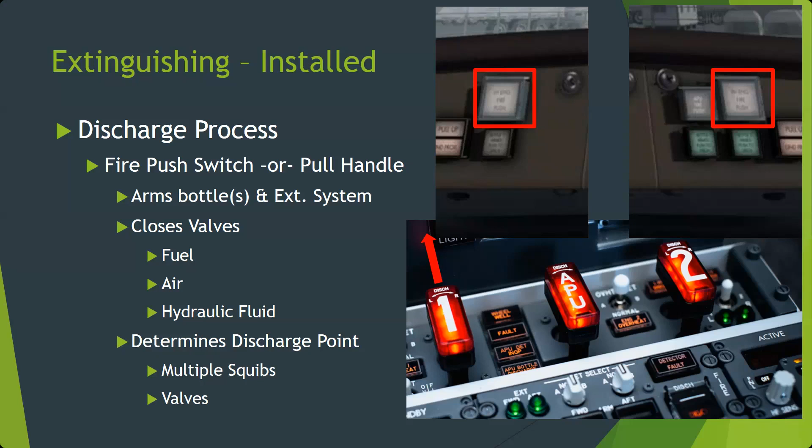So after we've pulled our handle up or pushed our activation button, then if we get to the point we have to discharge a bottle, that's what these buttons are for. So when I push this button, for instance, this button and this button light up - this is for the number one fire bottle and the number two fire bottle. Now, both of those can be discharged into the number one or left engine in this case. And that's the same thing down here.

On these handles, you can turn them to the left or to the right. So you've pulled it up, and if you twist it left, it's going to discharge what they call bottle A. And if you twist it right, it's going to discharge bottle B into the number one engine. So by pulling it up or pushing that arm button, that determines if you do discharge a bottle, where it's going to go.

Now, you don't always have to discharge the bottle. Often, simply pressing that arm button or pulling up on the handle, with the fuel valves closing and the hydraulic valves closing and the pneumatic valves closing and all that, the fire will just burn itself out at that point in the case of an engine fire.

So when we were teaching people to run and taxi aircraft mechanics, we would tell them, you get a fire, the first thing you do is stop the airplane. Don't sit there and try to fight a fire while you're rolling down a taxiway, because then you are going to end up in the grass before you realize what's going on, since you're looking down at handles and stuff instead of out where you're going. So first thing, stop the plane, set your parking brake, now start fighting the fire.

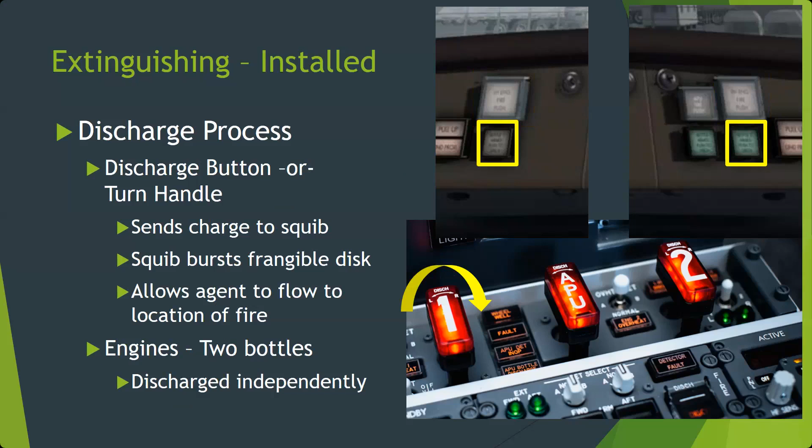And then we save our other bottle for later. So how that works, if we have two bottles but multiple engines, here's one way it works. We'll call them A and B container. They say engine 1 and engine 2 container, but they can both go. You can see there's actually two squibs on this container, with two discharge ports.

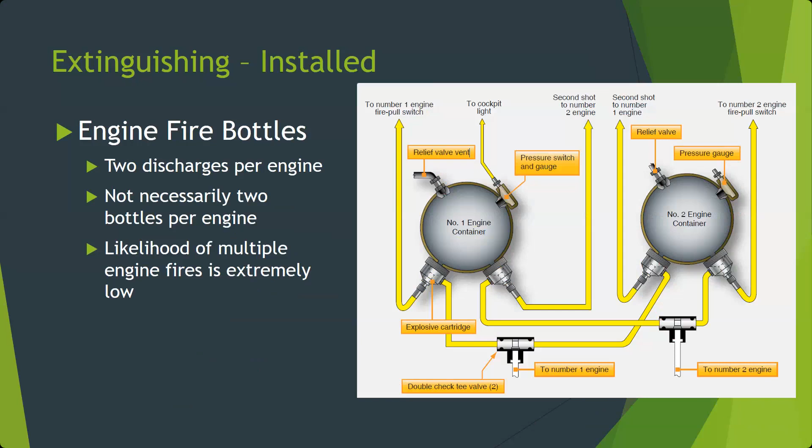This discharge port goes down through a check valve to the left engine, and this bottle has one that goes to the left engine as well. Or you can blow both bottles to the right engine. So two bottles can protect either engine with two shots of halon. This is just a bigger picture.

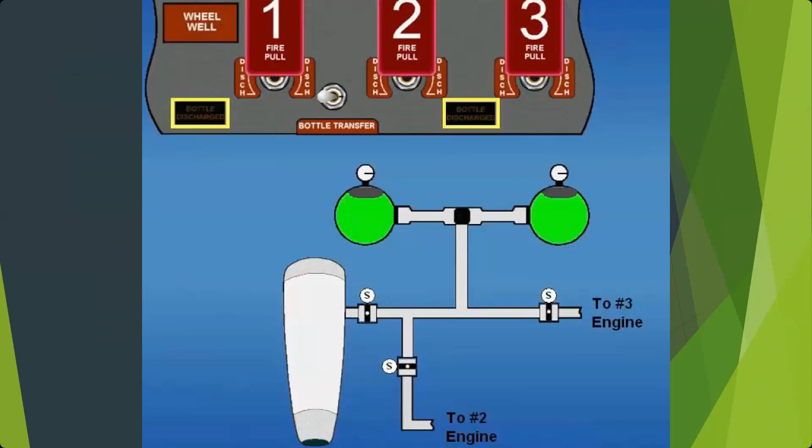Another method, like what the 727 uses, is two bottles T'd together, and then you have a shutoff valve for each engine. So say my right engine, my number 3 engine, was on fire. When I pull the handle, actually on that one it's overhead, when I pull that number 3 handle, it would open this valve right here, as well as shutting off the fuel valve and the hydraulic valve and other stuff going to the number 3 engine.

But it would open that valve. So then if I twist the discharge handle one way, it's going to release halon from this bottle. If I do it the other way, actually this one would be CO2, it would release from the other bottle. The 727 uses CO2 instead of halon. So that's how you can have multiple engines protected by certain fire bottles.

The 747 and the sim that we play with, there are 4 fire bottles. There's 2 in the left wing and 2 in the right wing. So in the left wing, you've got engines 1 and 2, and you can blow those 2 bottles to either of those engines. In the right wing, you have engines 3 or 4, and those 2 bottles can go to engine 3 or 4. They can't go across, there's no cross from wing to wing, but you've got two bottles per wing with 2 engines.

Cargo fire bottles are a single discharge, typically shared between compartments if there's more than one. They're set up so the halon or other oxygen-displacing agent can be routed to either a forward or aft cargo compartment by opening one valve or the other, the forward flow valve or the aft flow valve. If you just have a single cargo compartment, you eliminate those altogether.

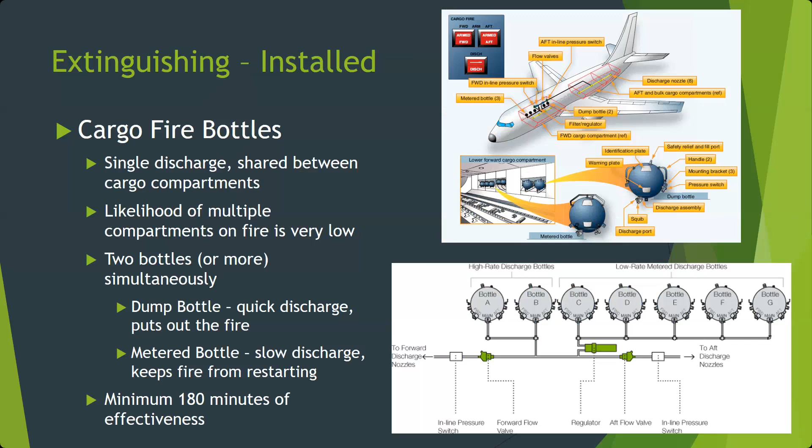Here's another image of how it's set up. You see the cargo compartment, with bottles in the wall, normally covered by panels.

For cargo fire, you have an arm switch, like a forward arm switch and an aft arm switch, and then a single discharge button. Say we had smoke in our forward cargo compartment, the forward armed button would light up. You'd press that. This also closes off conditioned air being sent into the compartment to keep it warm so Fluffy doesn't die of cold. That air supply closes, so the compartment gets cold and fills with a non-breathable atmosphere. Fluffy's going to freeze, shiver, and then pass out. Sorry, Fluffy.

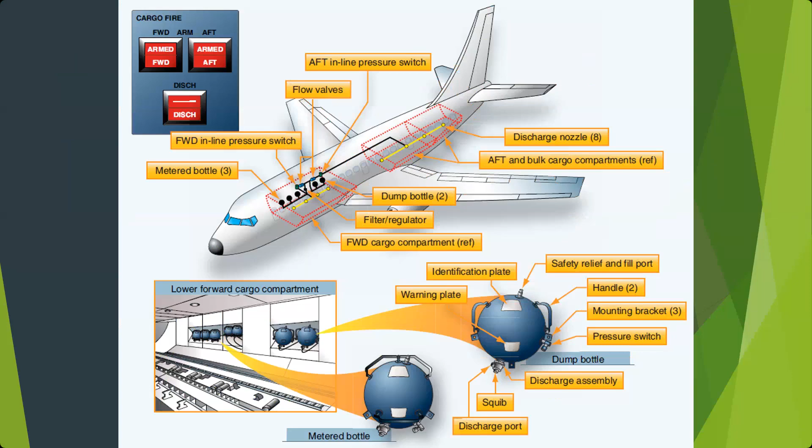Here's another image of what that looks like. It'll first close off the air supply, then you hit the discharge button to send the firefighting agent into that compartment.

Again, there may be as few as one of each bottle. Usually, if there's one of each, the high rate bottle is smaller and the low rate bottle is usually a bit bigger, but it's enough to flood the cargo compartment and then keep it flooded.

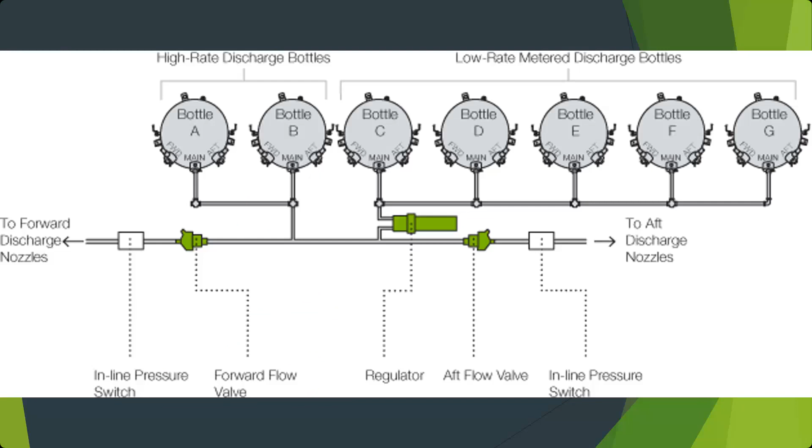APUs have their own dedicated bottle. These are fairly small, about the size of a softball, since they don't need to be big. They fill the APU enclosure with inert gas, discharging into that sealed compartment inside the fire zone, whether inside a titanium box or forward of a firewall, working similarly to the engines.

There's 2 switches, or a pull and turn. An arm switch closes your fuel valves and the pneumatic valves, so we don't get smoke from the APU into the cabin. Then you push a second switch, or turn the handle, to discharge the bottle. There's typically only one bottle for the APU, since once that fire's out, with the fuel valves closed and everything else shut, the chances of reignition are pretty low. And again, they're inside a fire zone, so that stainless steel or titanium enclosure will hopefully contain any fire in there as well.

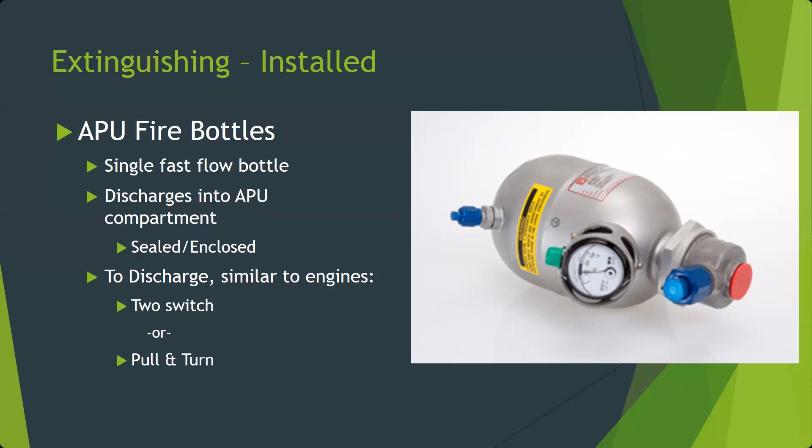The way we do know is every time we did a check - did cabin crew have to check the witness strips? I think our flight attendants did, if I remember right.

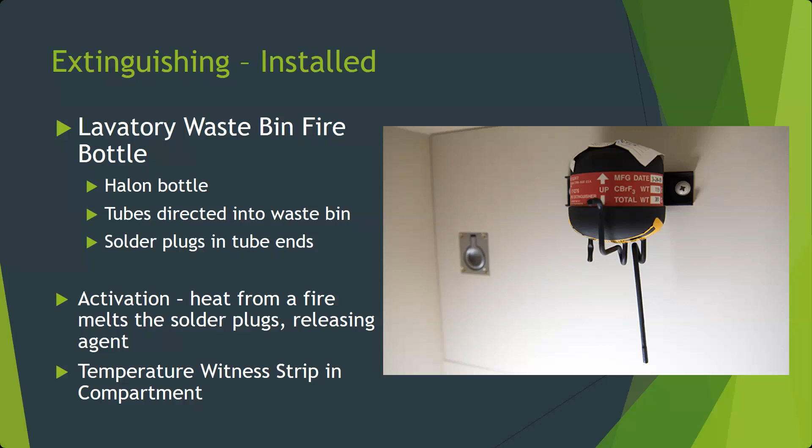The flight attendants will open the little door where the trash can is and look for a little strip, a sticker with little heat circles on it. If those circles have turned dark or black or dark gray, it means there was a fire that caused them to get hot and the bottle likely discharged. So pre-flight, the flight attendants go in there, open the little door, and make sure their heat strip doesn't say there was a fire.

That strip right there, they're just heat sensitive, like receipt paper. You ever have thermal paper? It's like a thermal paper, printers that do heat print.

A vape. Probably got hot, it's heat related. They have a heat element in them, and the batteries can get warm. The old ones, back in the day, I worked with a couple guys that there was this whole culture around making your own vapes. It was really weird. Are you familiar with that? Like people that make their own vapes.

Is it still around? I don't know. I know I had a couple guys I worked with that were really big into it, and then Juuls came out and people were like, I don't want to mess around with all that. But the batteries, you want to talk about lipo or lithium ion battery fires - these guys were getting cheap cells from China that were sketchy as all get up, and they'd catch fire while people were vaping and burn their lips. So I could see one of those setting this thing off.

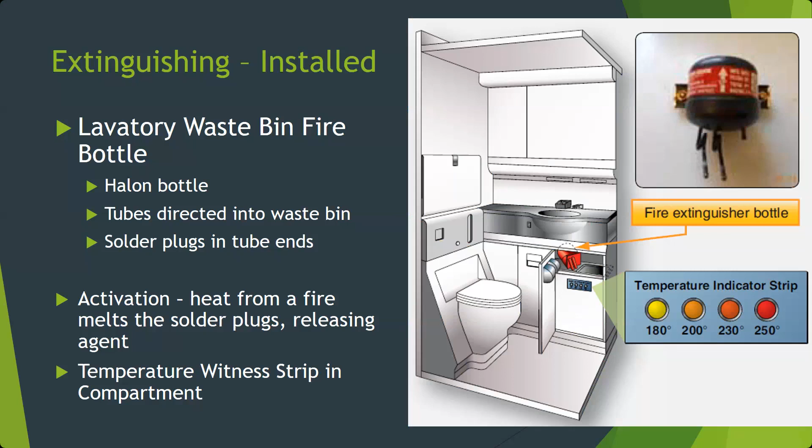I remember when I was like 6 or 7 sitting there playing with the ashtray in the armrest, and my mom yelling at me, 'That's dirty, get your fingers out of there.' Anyways.